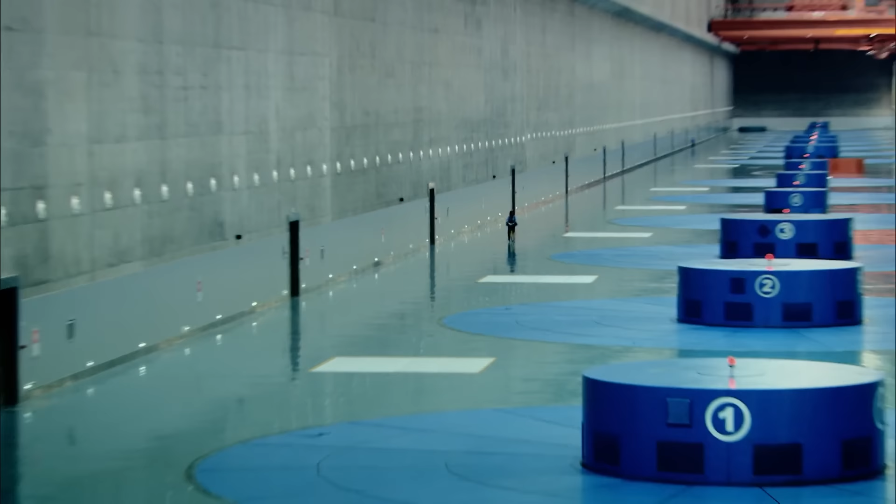In this episode, an engineering project of epic proportions. It's the weirdest sensation, it's really insane. I think it's the greatest project I've ever seen. Harnessing energy on a record-breaking scale. Just listen to that - that is the sound of huge quantities of water. And the pioneering historic innovations. Wow, it takes your breath away. This is an amazing, but quite terrifying experience. That made the impossible possible.

China, the biggest manufacturer in the world, and soon expected to have the largest economy of any country on the planet.

But all that success brings with it a major challenge. China is a country with an unquenchable thirst for energy.

Something engineer and Shanghai resident Yewande Akinola witnesses firsthand every day. Living in downtown Shanghai, it's so easy to see how much energy is consumed on a daily basis. In this city alone, population has grown to 24 million people. That is why this country needs more energy.

China's traditional power stations burn as much coal as the rest of the world combined. But with fossil fuels a finite resource, China's engineers face a seemingly impossible problem: how to keep the lights on and China's dreams alive.

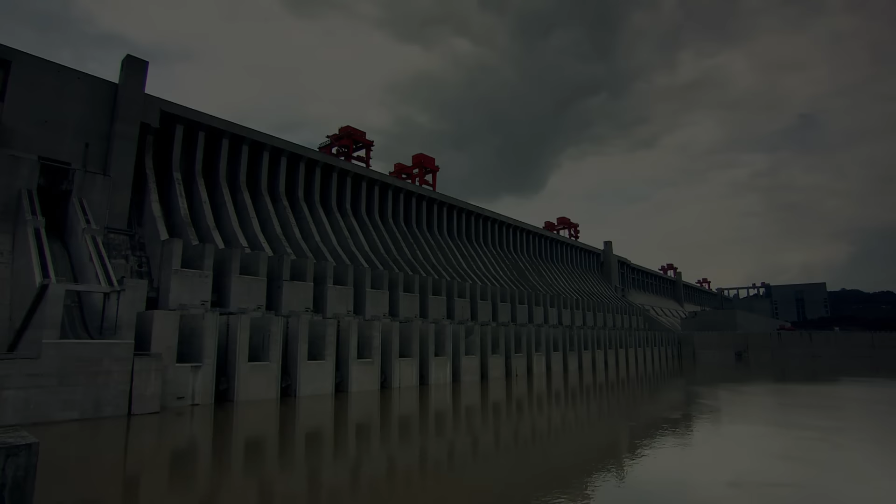The area is prone to catastrophic floods. To lessen the possibility of flood damage and to create a source of clean power, engineers have dreamed of building a dam like this for the last 100 years.

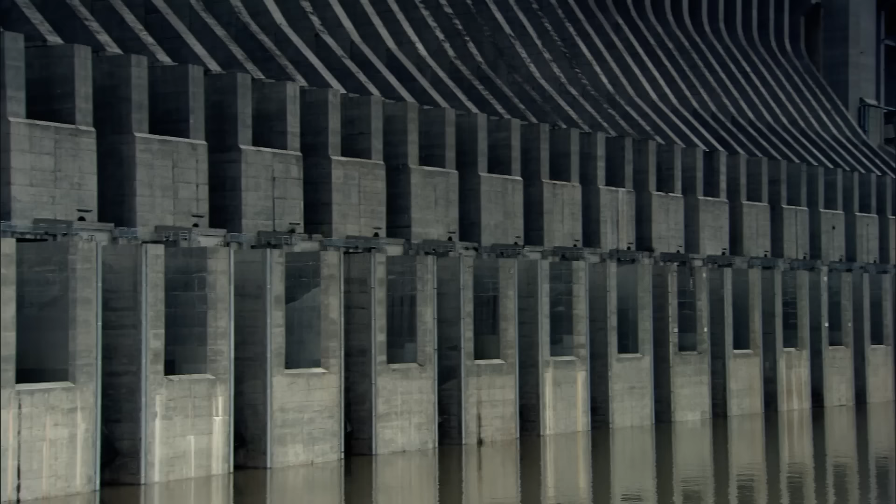Construction is now entering its final phase. For Deputy Director of Construction Technology, Mr. Qihua Ding, it's the challenge of a lifetime. I've been working here for more than 30 years. I think it's the greatest project I've ever seen.

In order to create such a seemingly impossible structure and harness the power of one of the world's largest rivers, engineers need to draw upon centuries of innovation.

Humans and the odd animal have been building small dams since the dawn of history. In the ancient Middle East, they realized that dams could protect from floods in wet weather and store water in dry seasons.

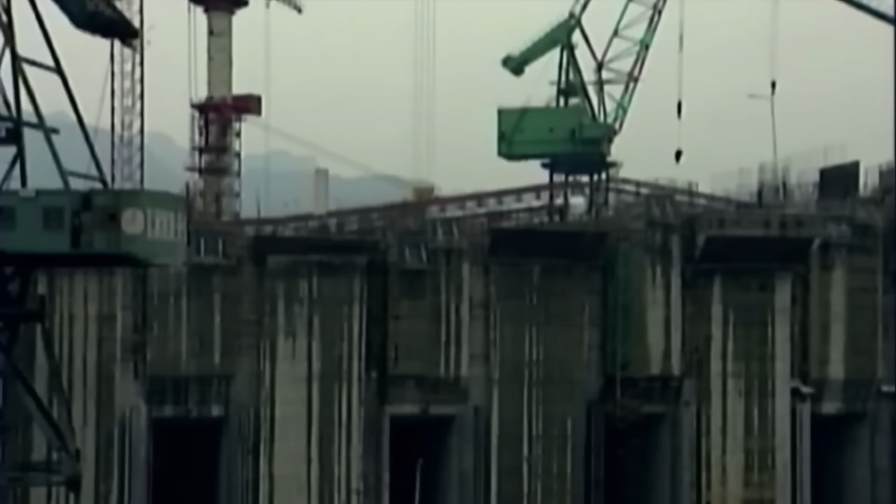But China's Three Gorges Dam will eclipse anything ever built before. The Three Gorges Dam is the biggest dam in the world. It has a quantity of more than 28 million cubic meters of concrete.

With tens of millions of people living further along the Yangtze, getting the build right is literally a matter of life and death.

With millions of tons of water pushing against the wall, the residents downstream are really depending on this wall to stay up. Any imperfections and the consequences could be catastrophic.

Such a feat of concrete construction would be impossible without one of history's great innovators.

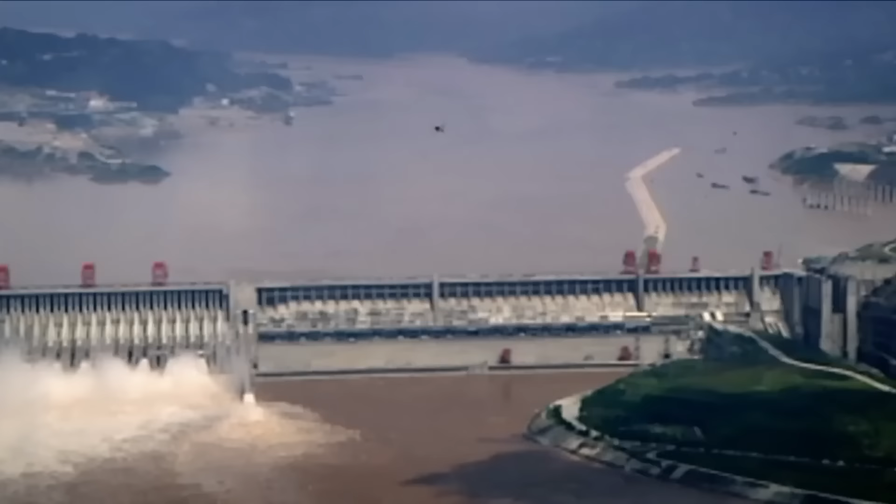In the early 20th century, the parched American Southwest was becoming desperate for both water and power. It was a problem that would require an epic engineering solution. And Professor of Civil Engineering Andrew Smith is heading for a bird's eye view of it.

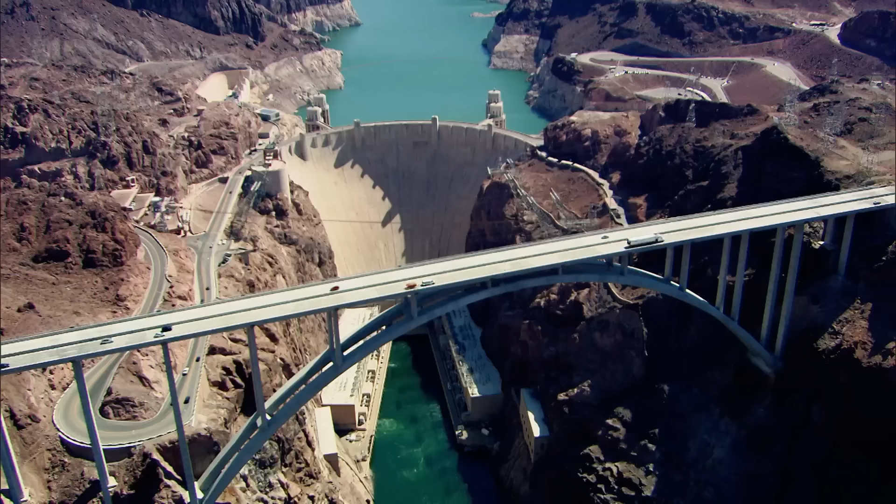Wow. This is the Hoover Dam. At the time of its construction, this was the world's largest concrete structure that had ever been built.

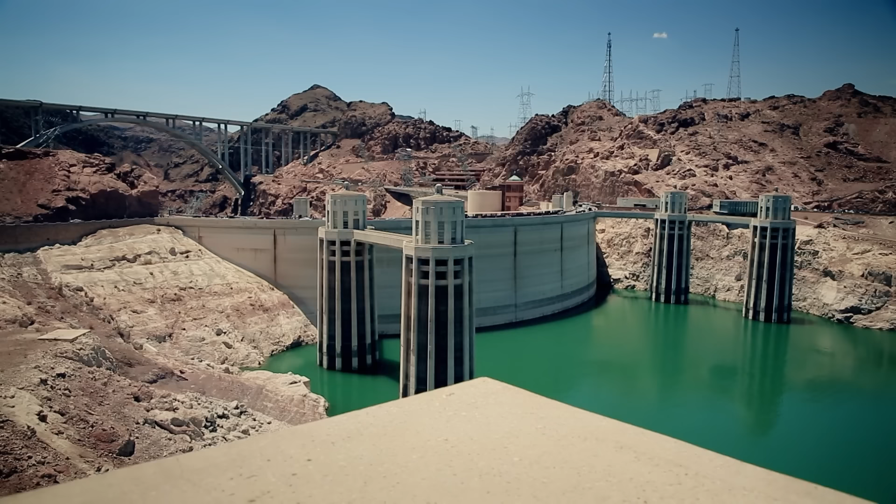Even today, roughly 80 years later, it takes your breath away. The Hoover Dam was like nothing that had been built before. Weighing in at 6.6 million tons of concrete, this was an unparalleled engineering marvel.

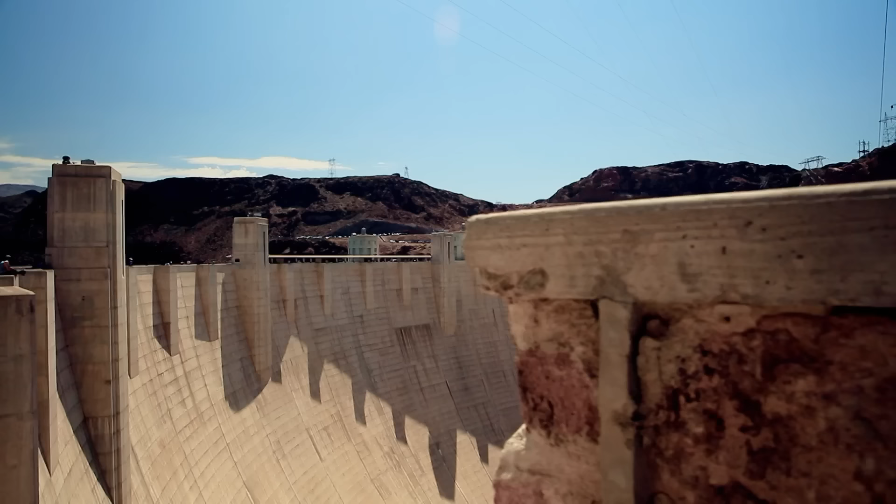By attempting to tame the mighty Colorado River and harness the power locked within it, its engineers were setting themselves a seemingly impossible challenge. The dam stands 700 feet tall and has a base thickness of 660 feet. The biggest problem and the biggest challenge was one of sheer scale.

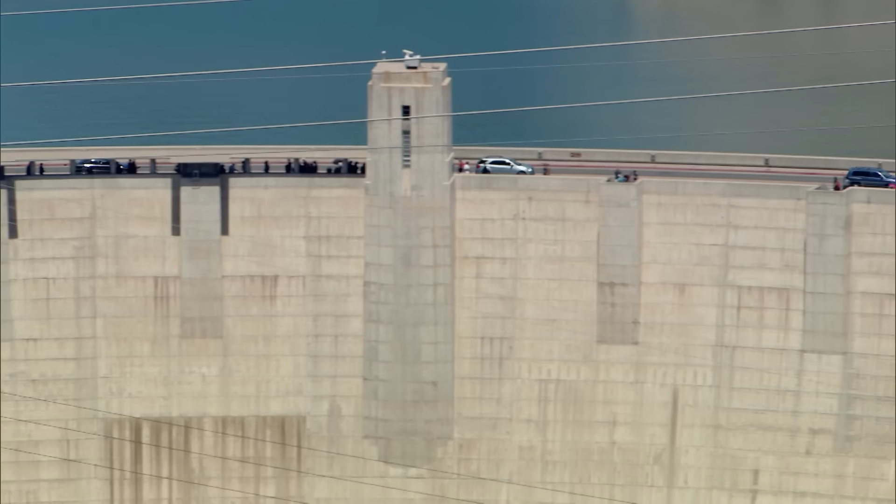The problem lies in the way that the chemical components of concrete react. So what I have here is cement as well as water, and these are really the two main active ingredients in the curing process. Now, before it really starts to cure, let's quickly check the temperature.

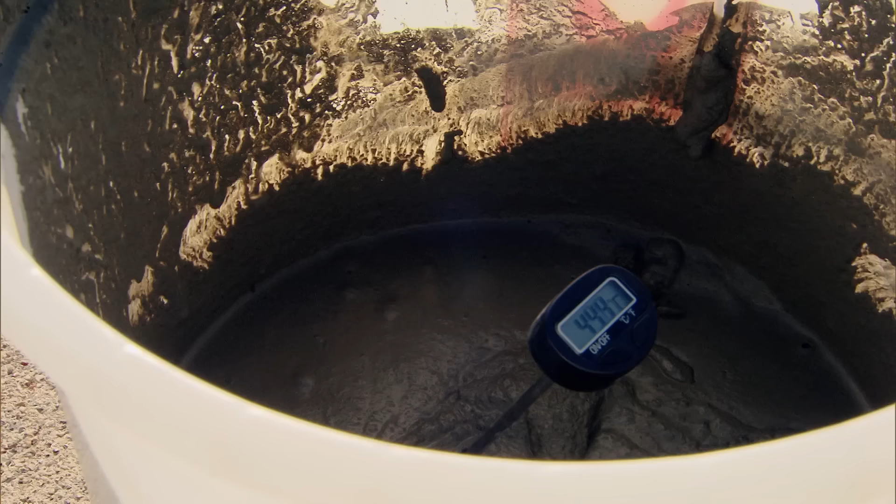Before I dipped it into the concrete, the thermometer was already reading 44 degrees Celsius. Gives you an idea of how hot it is here. It takes just half an hour for the temperature of the mix to reach its peak at 68 degrees Celsius. That's an increase from our original temperature of 24 degrees Celsius. And you could really, really feel the heat.

Engineers estimated that if they poured all the concrete in one go, it would take 125 years to cure and cool, meaning uneven setting and potentially catastrophic cracking.

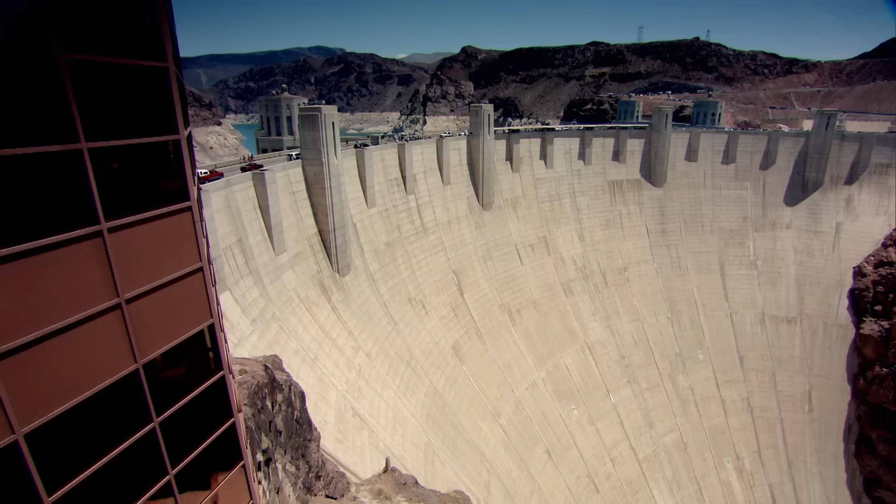It was down to the project's general superintendent, Frank Crowe, to solve the conundrum. And what he came up with is still visible today in the old engineers' inspection tunnels, running deep within the dam.

Frank Crowe, nicknamed here on the site Hurry Up Crowe, came up with an ingenious method for cooling the concrete to help it cure faster. The solution was to pass extremely cold water through 1-inch pipes. And the amazing thing is we can actually still see evidence of those pipes here.

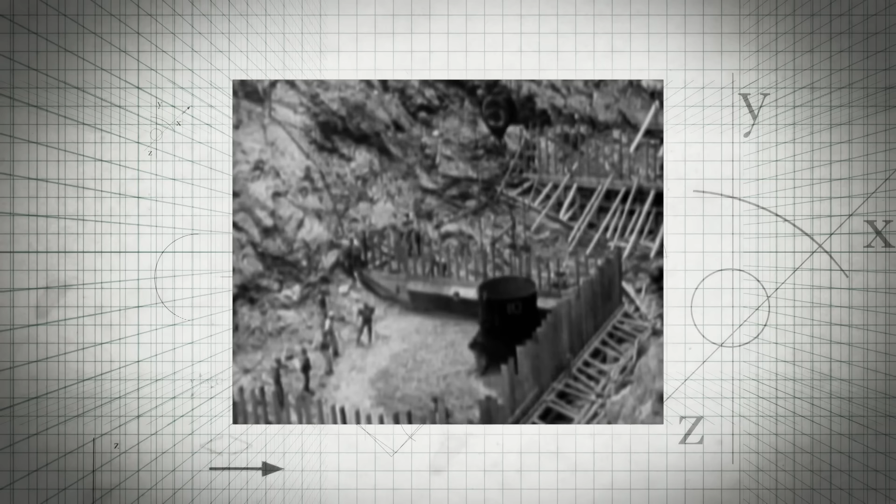In 1931, thousands of workers began constructing the dam out of a series of gigantic blocks, all the time cooling the concrete with ice-cold water, produced by a specially built refrigeration plant. And it worked perfectly. The whole job was completed in 1935, 2 years ahead of schedule.

And the record-breaking dam even created a record-breaking body of water behind it. This is Lake Mead. When the dam was erected, it became the world's largest man-made lake. At full capacity, they say, the volume of water could cover the state of Connecticut with 10 feet of water.

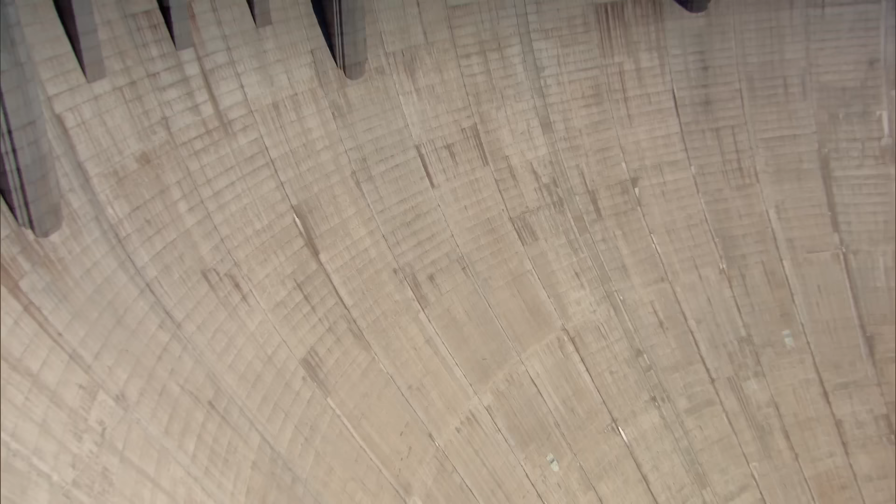As an engineer, this is an incredible sight to see. Harnessing the power of the Colorado and the giant Lake Mead meant even now, over 80 years later, the Hoover Dam provides electricity to 3 states and brings light to some of the world's great metropolises.

Impressive as the Hoover Dam is, the Three Gorges Dam is an incredible 5 times the size. The height of the dam is 181 meters, and the total length of the dam is 2,309 meters. The design requires almost 28 million cubic meters of concrete.

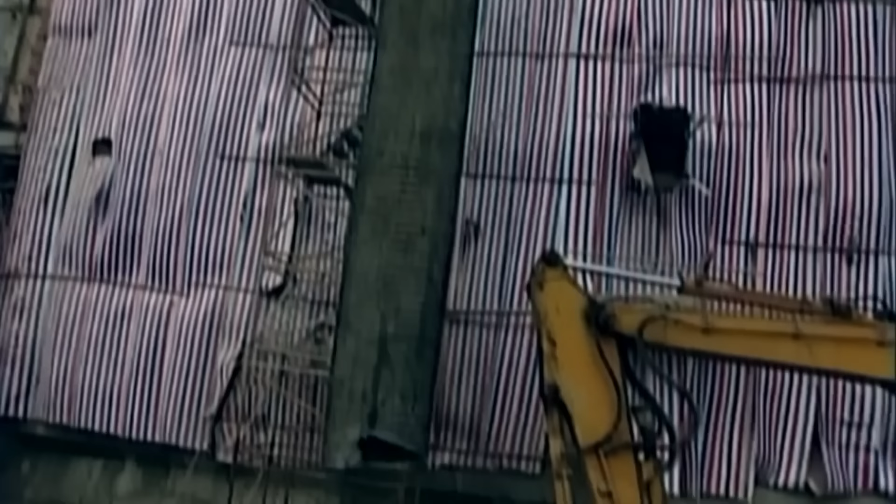In 1998, pouring begins. To accelerate the setting process and reduce risk of cracking, engineers take the techniques pioneered at the Hoover Dam to a whole new level. The ingredients are air-cooled even before they're mixed.

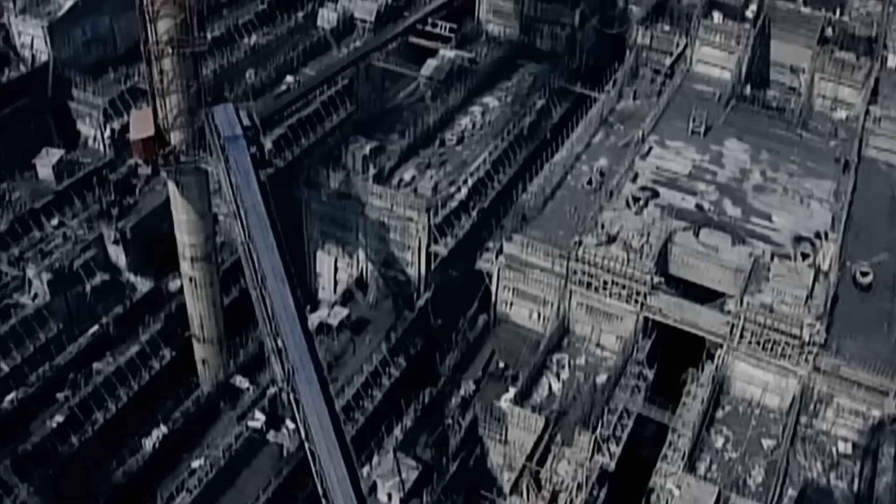High-speed conveyors take the concrete from mixing zone to site in just 15 minutes, and vast amounts of workers are used to pour an average of 20,000 cubic meters every single day. In the peak period, more than 30,000 people took part in the construction.

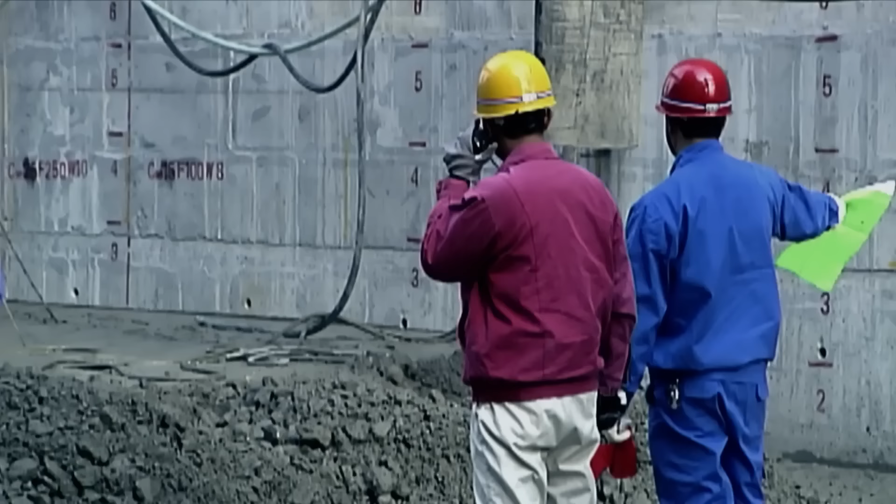Water cooling is supplemented with a mist sprayed over the working area to reduce the effects of the hot summer weather. The enormous concrete pour takes a total of 8 years.

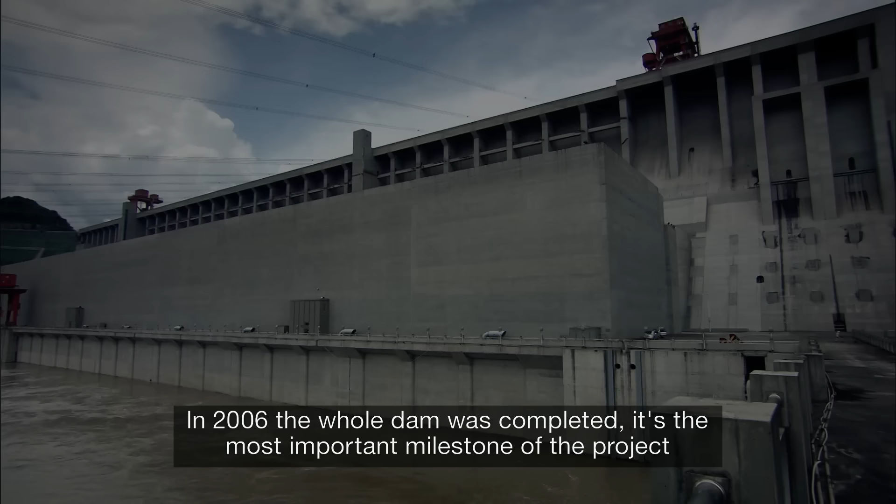In 2006, the whole dam was completed. It's the most important milestone of the project. Of course, I was very excited at that time.

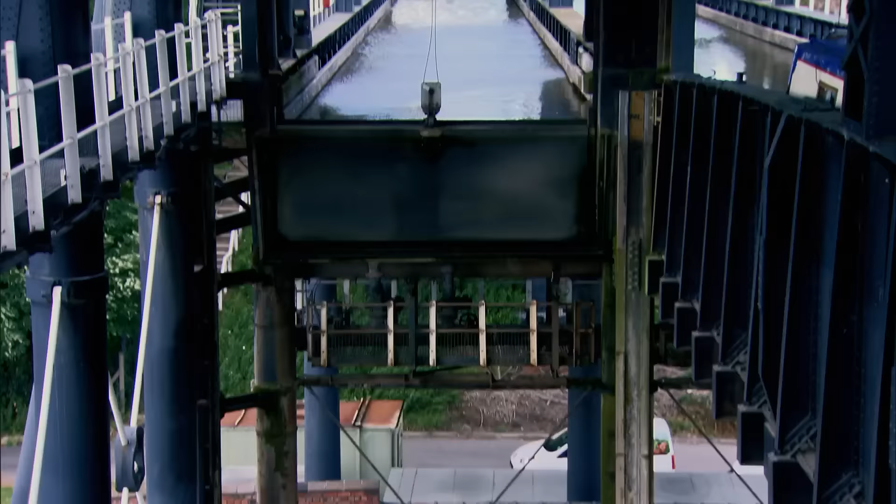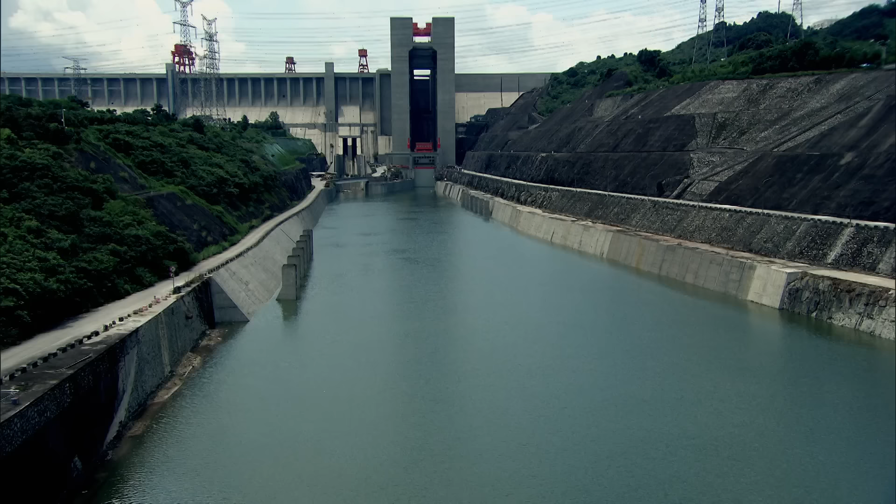At over 2 kilometers long, the Three Gorges Dam in China is one of the most ambitious engineering projects ever attempted. Built to tame the regular floods that hit the Yangtze River and harness the clean hydroelectricity potential of China's largest waterway.

Engineer and Shanghai resident Yewande Akinola has travelled to see firsthand how its creators are taking on this seemingly impossible challenge. The Yangtze River is the 3rd largest and longest in the world, running at 6,400 kilometers.

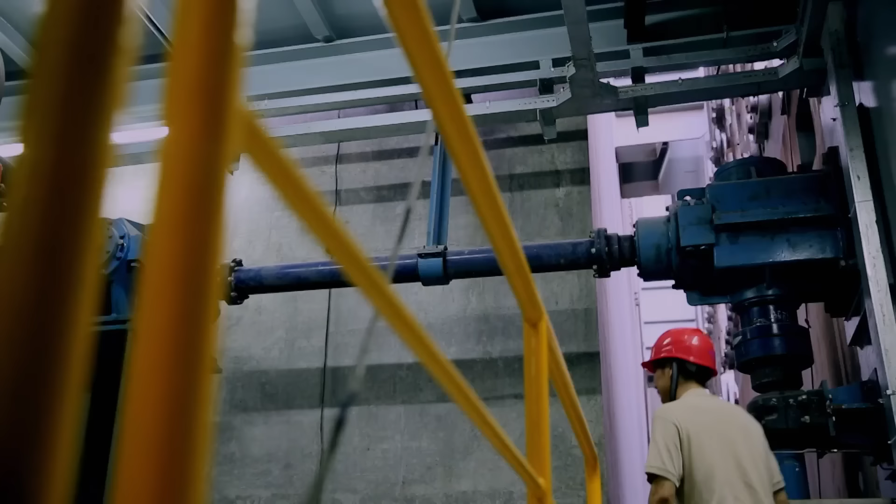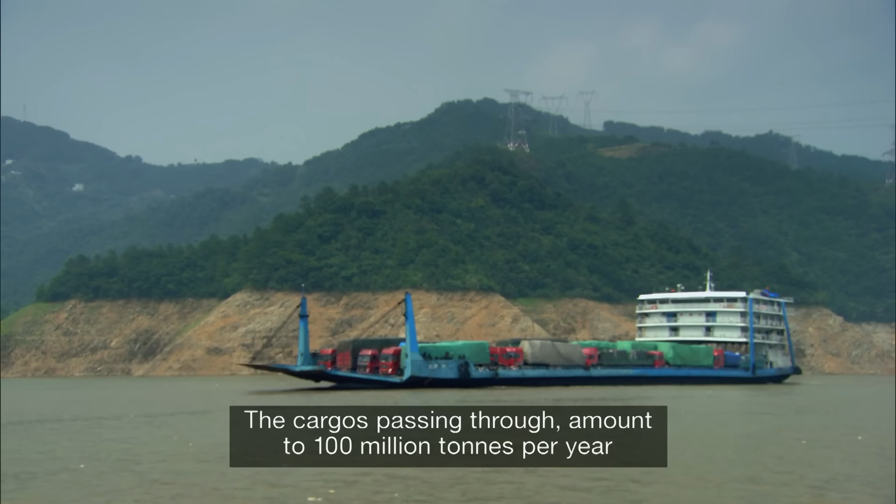And the river is now the lifeblood for the thousands of people who live along it. For Three Gorges engineer Qi Huading and his colleagues, completely blocking this busy and vital waterway is simply not an option. The Yangtze River is the mother river of the Chinese people. It's the lifeblood of the people along this river. The cargoes passing through amounts 100 million tons per year.

To deal with the cargo ships, the Three Gorges team have employed a technique dating back to medieval times. Here is the Three Gorges ship lock. It's the largest ship lock of this kind in the world. The lock is more than 1.5 kilometers long and raises and lowers the river traffic 113 meters through 5 giant steps.

The ship lock is very busy. It works nearly 24 hours a day. And we take a very small time to maintenance.

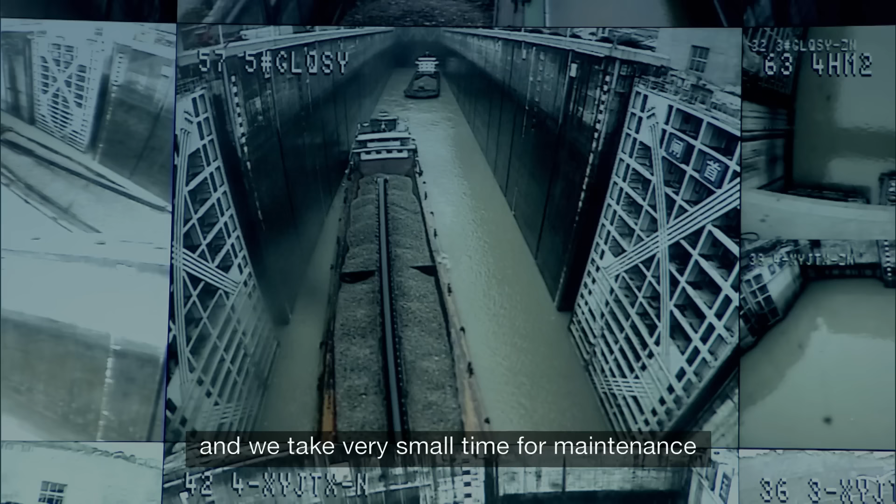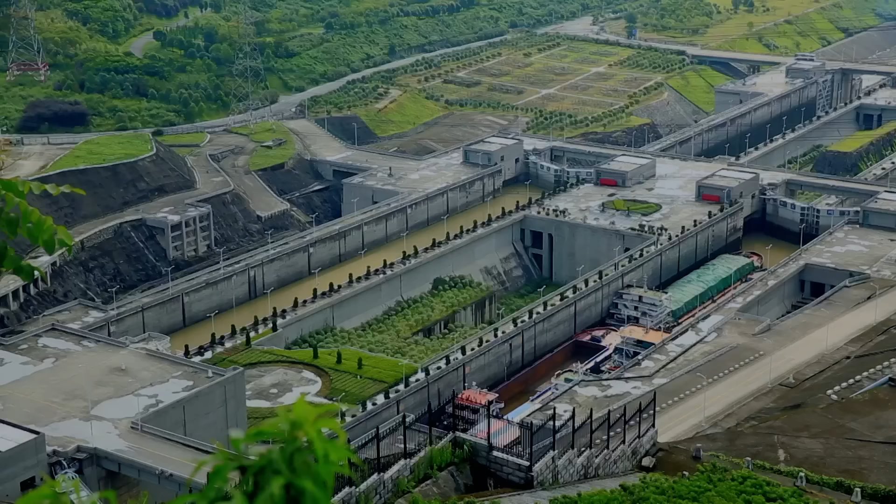But there's one element of this incredible engineering feat that doesn't suit all the vessels on the Yangtze. It takes about 3 hours and 40 minutes or even 4 hours to pass through the ship lock. Taking up to 4 hours to pass through the locks is simply too slow for the river's many passenger ships.

So Mr. Ding and his fellow engineers face another gigantic conundrum. How can they get ships up and over the dam 8 times more quickly?

Anderton, in the north of England. In 1870, designer Edwin Clark was employed to solve a particularly tricky problem, one that would be familiar to the engineers of the Three Gorges. He was asked to find a way to link the busy Trent and Mersey Canal with the adjacent River Weaver.

This was a pretty stiff challenge for Clark in the late 1800s because the height between the canal and the river was about 50 feet. Transferring the salt from the canal to the river was time-consuming, laborious, and really slow. So Clark had to come up with an ingenious solution.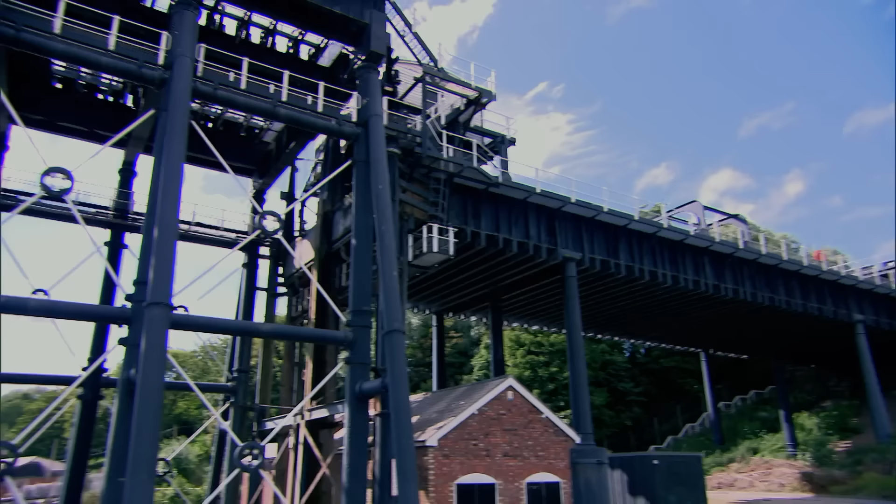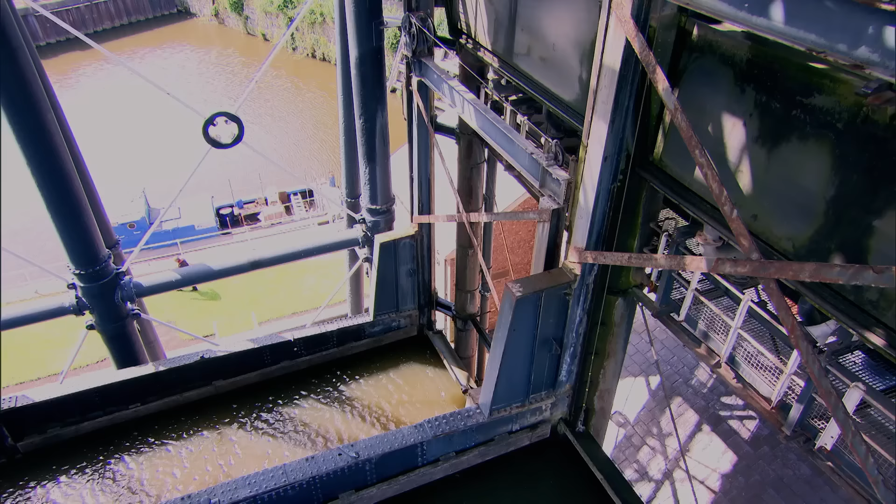Almost a century and a half later, Dr. Rhys Morgan is still able to experience that solution himself. Known as the Iron Spider, the Anderton is the oldest operating boat lift in the world. It's extraordinary. It's a 3-story high marvel of Victorian engineering. It's just fabulous.

Clark's mighty construction scooped up the barges and the water they were floating in and transferred them in one smooth action, 15 meters between the two levels. To do it, he used what was at the time a cutting-edge technology: hydraulics.

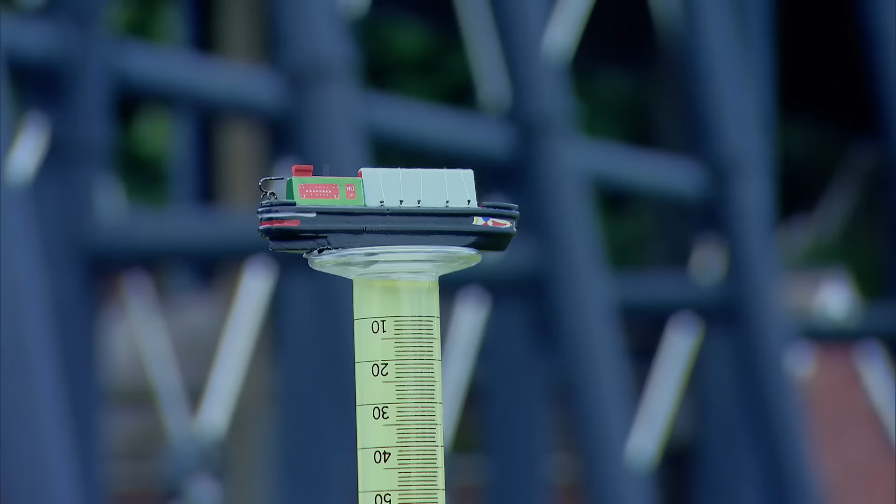The basic principles of all hydraulic systems are defined by a law created by a French mathematician called Blaise Pascal. It goes something like this: if you apply a pressure on a liquid in a closed system, then that pressure is distributed throughout the whole liquid in the system. Edwin Clark used this to great effect with his boat lift at Anderton.

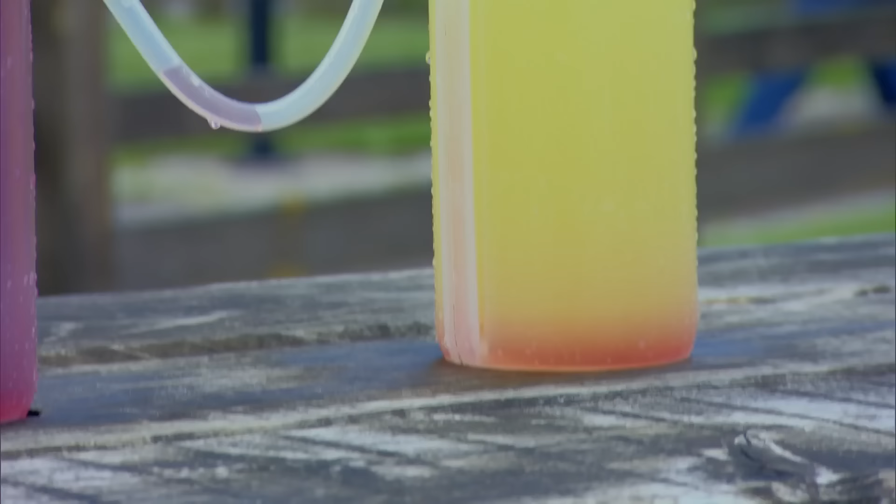He started off by making 2 watertight caissons. These are the tanks which held the boats and the water in which they floated. He supported those caissons on top of 2 hydraulic rams, and there was a liquid in those rams and a pipe joining them both together.

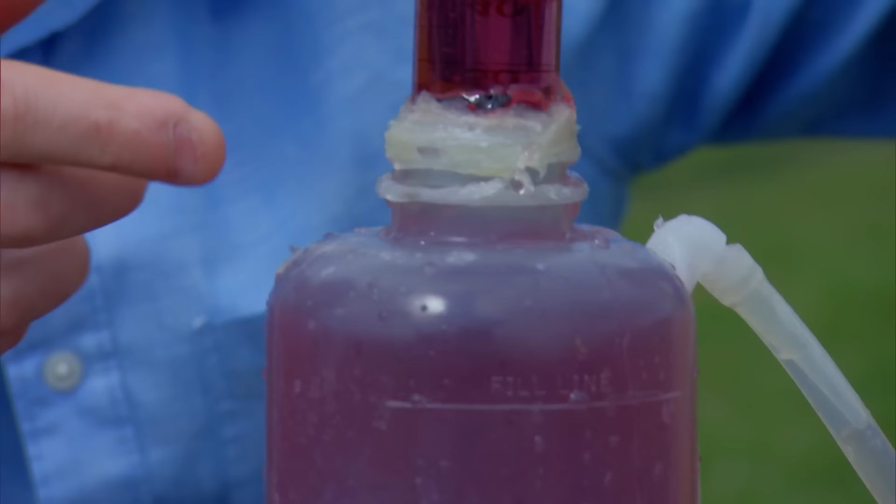So as I exert some additional force to this hydraulic ram, I can start to see that the pressure is being pushed through the adjoining pipe and lifting up my other hydraulic ram. It's brilliant.

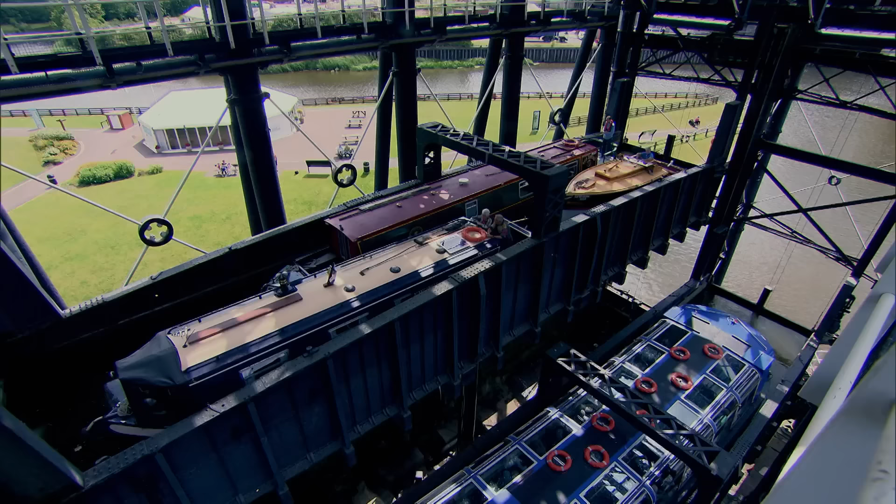The design was genius in its simplicity. The 2 caissons were perfectly balanced, so all that was required to push the upper caisson down and so lift the lower caisson was an extra 15 centimeters of water.

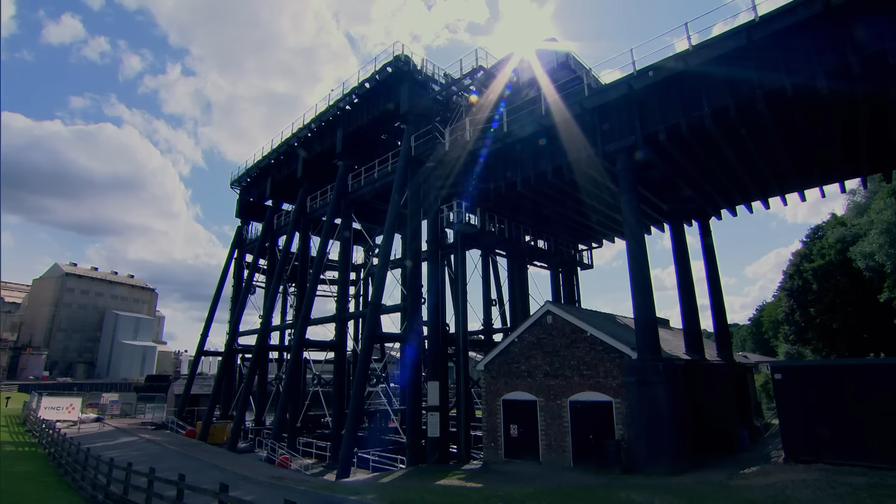The result: an almost effortless rise and drop for up to 4 narrowboats simultaneously. And most importantly, the journey time took less than half an hour, and that saved huge amounts of time and enabled the trade to be much quicker. It's just a fabulous piece of engineering. It's wonderful to be here.

Edwin Clark proved that moving boats between different water levels was no longer impossible, and his ingenuity inspired generations of engineers around the world.

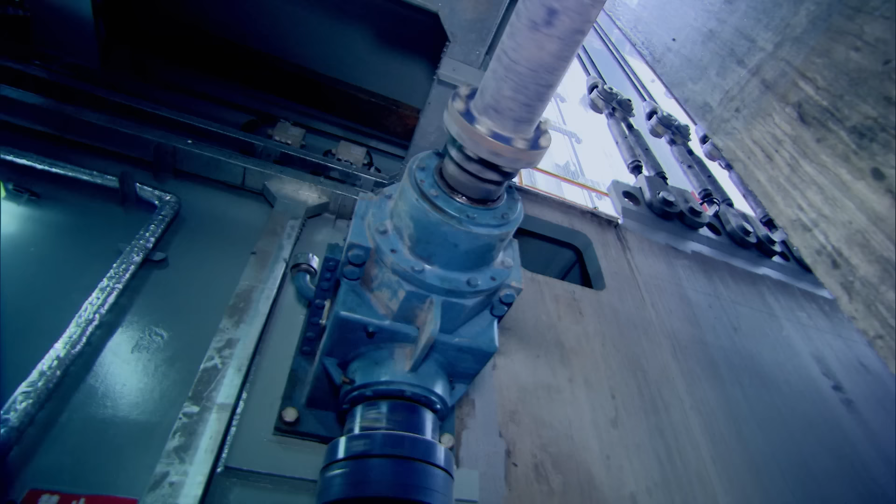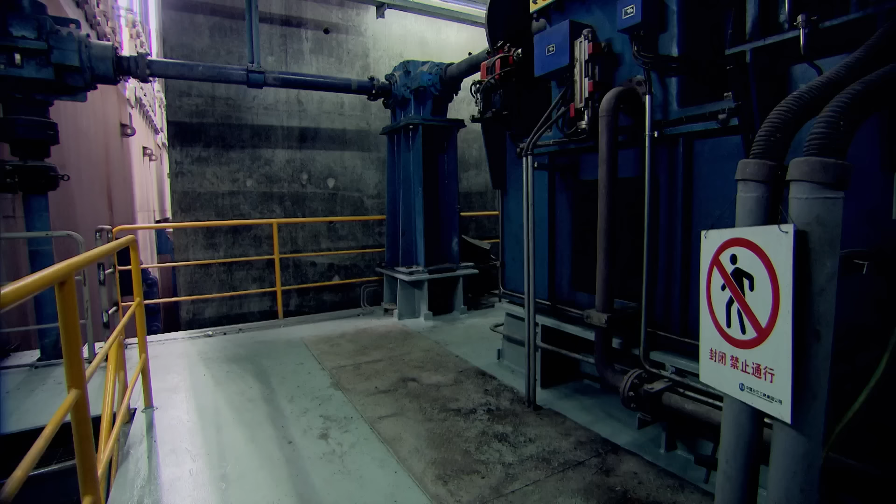It's the weirdest sensation, it's really insane. It feels like I'm in a big, massive swimming pool and being pulled up many, many meters, or in a lift with a massive pool in it, being lifted up. It's an engineering feat, a beauty in so many ways, and super impressive.

Capable of carrying a 3,000-ton passenger liner, this vertical ship lift consists of reinforced concrete towers which support the huge steel pool.

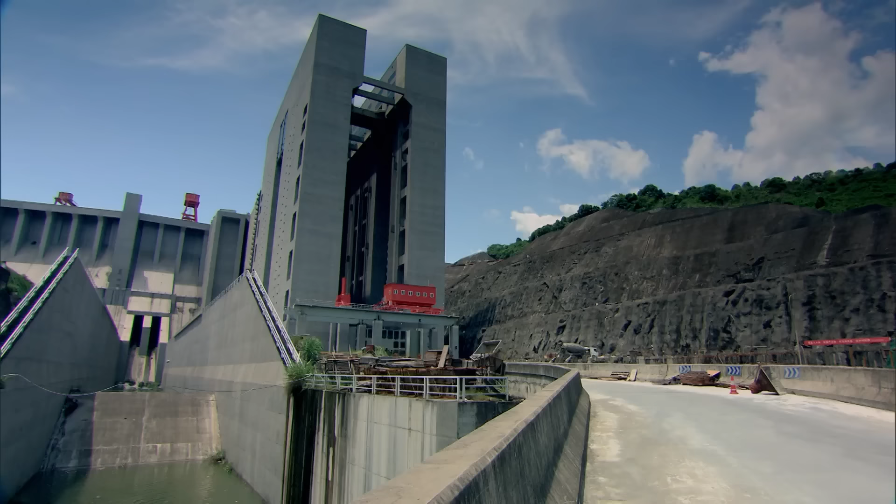Instead of hydraulics, the lift will use massive counterweights and pulleys to lift the 132-metre-long pool and the vessel floating in it a vertical distance of 113 metres. I think it's the best ship lift in the world. The counterweight of the ship lift weighs nearly 16,000 tons.

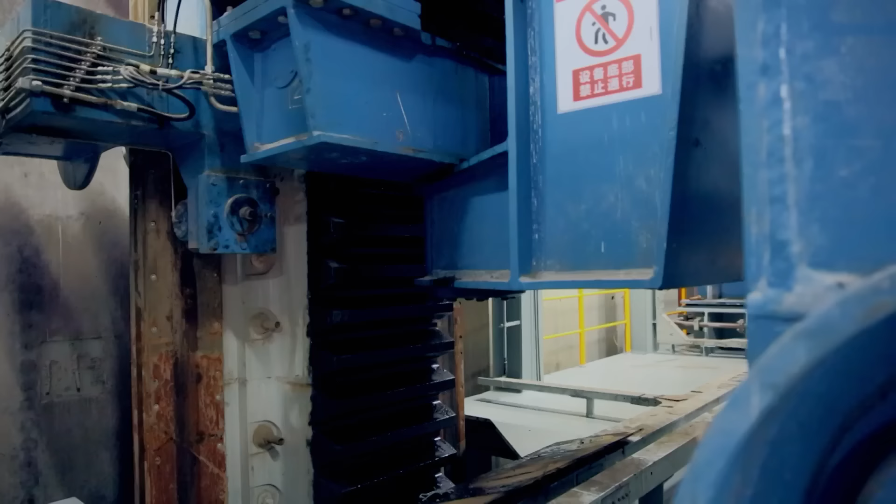I think it's a massive achievement for the Three Gorges Dam. This world record-breaking lift will solve the seemingly impossible challenge of transporting passenger ships across the dam without frustrating delays.

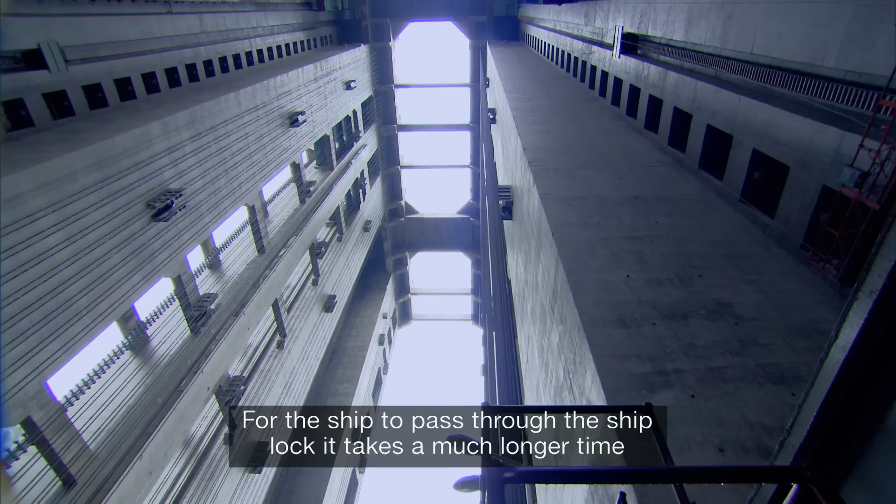For the ship to pass through the ship lock may take much more long time, so the ship lift is the fastest way for the boat to pass through the dam. The Three Gorges ship lift is the biggest in the world right now. To keep passengers happy, when this is complete, it would take only 30 to 40 minutes of travel time from top to bottom. Now, this is a brilliant solution.

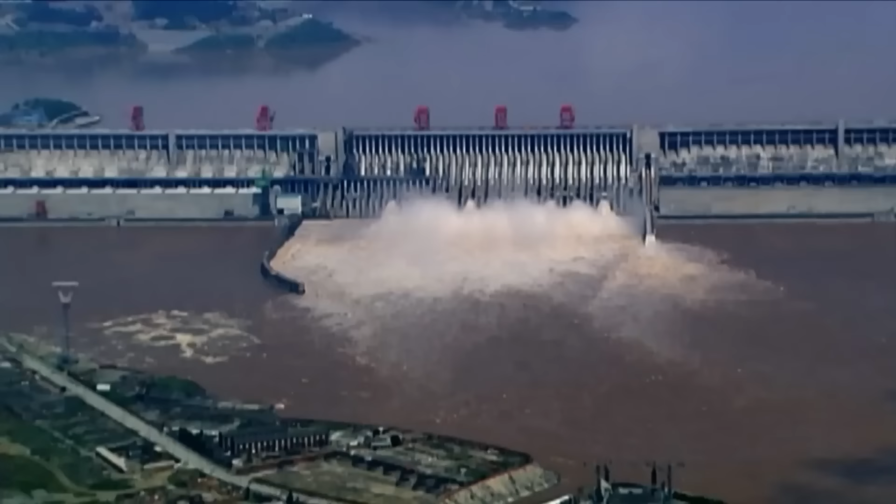Stretching more than 2 kilometers across the Yangtze, it holds back a reservoir of over 1,000 square kilometers. One of its key functions is to reduce the risk of flooding in the region.

Shanghai-based engineer Yewande Akinola has traveled to Hubei province to see how the dam's team are taking on this seemingly impossible engineering challenge.

Every 10 years or so, the Yangtze River floods quite seriously. In fact, over the last 2,000 years, there have been over 200 catastrophic floods, which unfortunately have cost over 300,000 people their lives.

Dams can help control the effects of excessive rainfall, but extreme floodwaters can also cause dams to collapse, with catastrophic consequences.

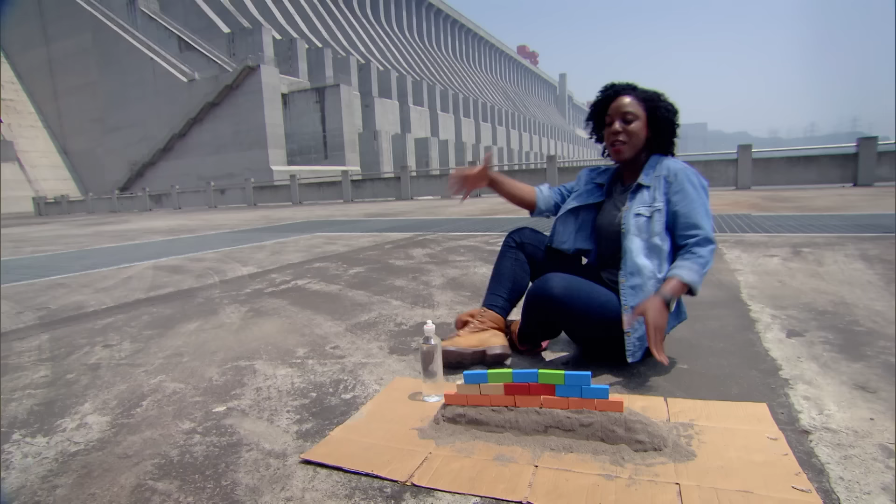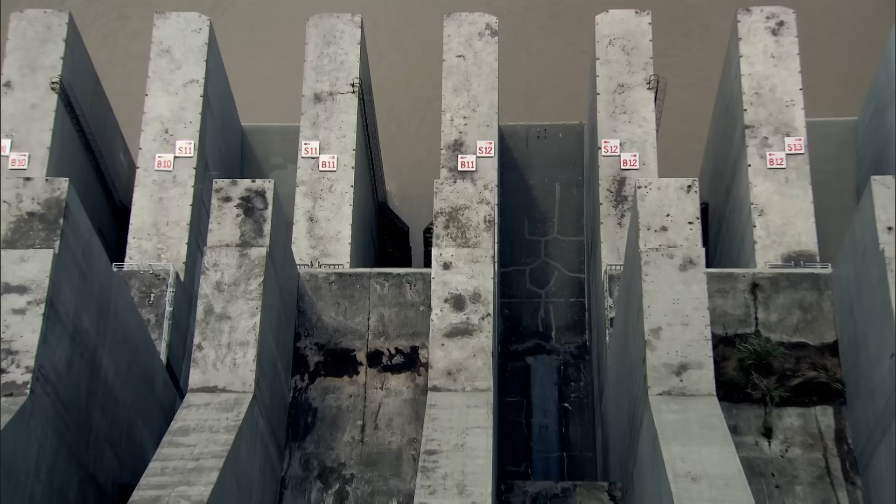One problem is called toe scour, when water spills over the top of the dam and wears the foundations away. Now, if we imagine a flood situation where we have lots and lots of water flowing over this dam, we've got all that water hitting the bottom of the dam. As we can see here, the integrity of the dam becomes very questionable and it starts to collapse. So there it goes. The consequences of the giant Three Gorges Dam failing are almost unimaginable.

So, to reduce this deadly risk, its designers need to look to one of history's great innovations. In the 1930s, construction began on the first large-scale dam on the French River Dordogne. Engineer André Coyne was given the job.

This is an amazing but quite terrifying experience. Dr. Rhys Morgan is getting up close and personal with the mighty dam.

I'm here with this huge dam behind me, and I'm stood next to this overflow channel, and luckily for me today, the gates aren't open, because if the reservoir was too high and the water was overflowing, the gates would be opened and some 700 cubic meters per second of water would be gushing out, flowing down this spillway, and I'd probably be blown away just by standing here.

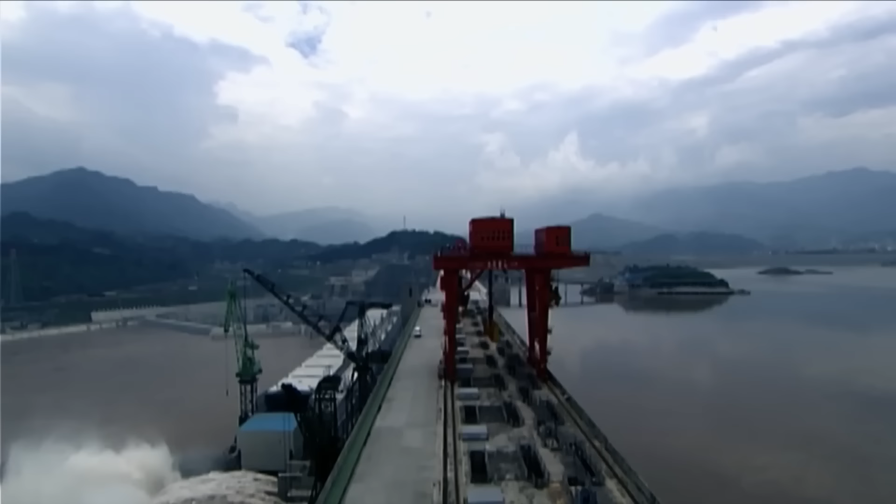So how can engineers make the Three Gorges project the most productive hydroelectric power station on Earth?

Man has always recognized the potential power of water for industry. Ancient miners built dams in order to collect water and then release a wave to scour the land.

In the Middle Ages, Islamic engineer Al-Jazari designed dozens of ingenious water-powered devices, from irrigation systems to extraordinary clocks. Have you got the time?

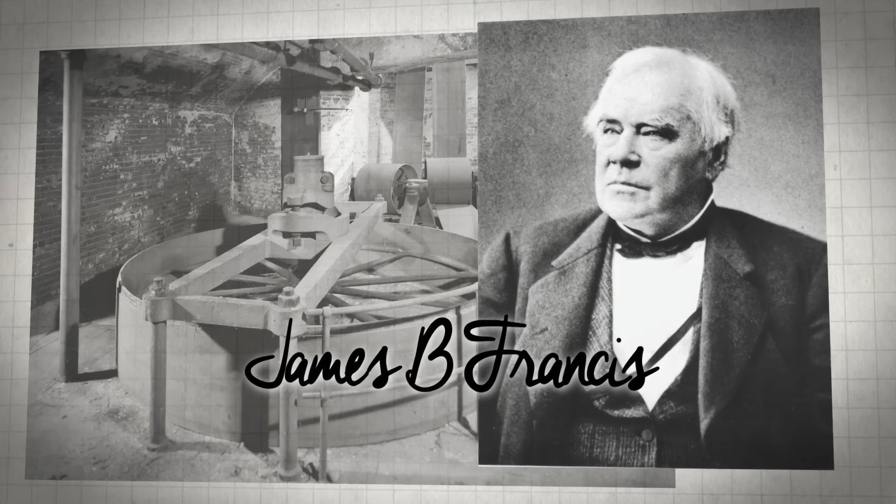But it would be the Industrial Revolution that would take hydropower to another level. In 1834, British-born engineer James B. Francis arrived in the busy textile town of Lowell, Massachusetts.

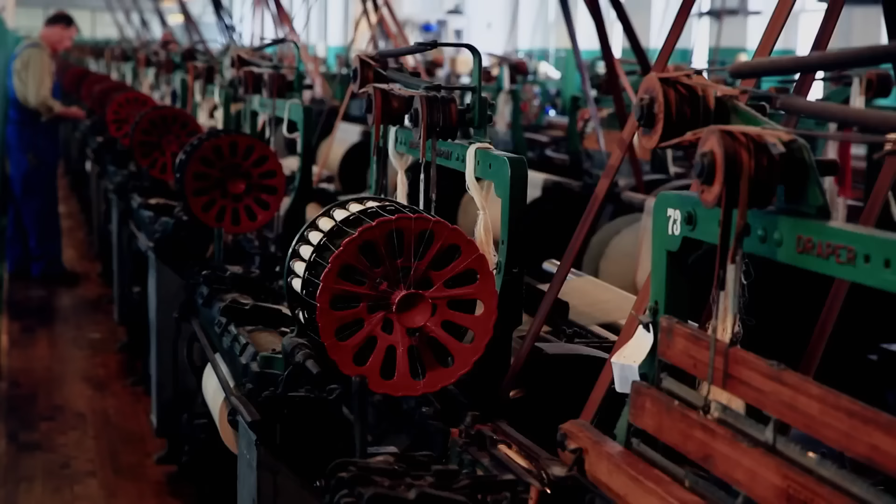At the time James Francis arrived here in Lowell, massive mills like this one were sprouting up all along the vast canal system. The mill complex ultimately would produce up to 160 miles of cloth every day.

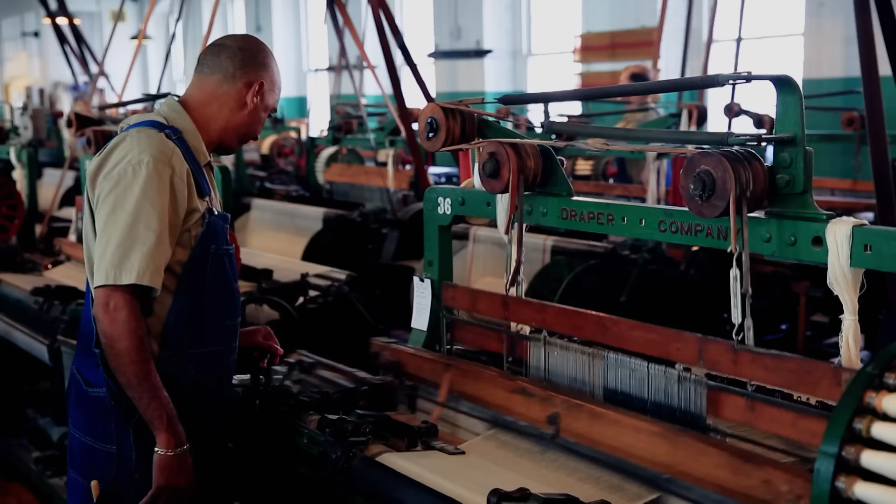But the power began to run out. With the industry's thirst for energy, the water in the canals became increasingly precious. It fell to James Francis to find a way to squeeze as much power as possible out of each and every drop. The problem was that the mills here in Lowell were being driven by simple water wheel systems. These are relatively inefficient. They're driven by water falling into the buckets to make them turn, only using a portion of the energy available here in the canal system.

What Francis went on to design would change the world forever. And his original invention can still be found deep within the canal complex.

Wow, so this is it. This is the site of the very first James Francis turbine. The turbine is actually 5 meters below us. It's amazing to think that this turbine right here started the hydropower revolution.

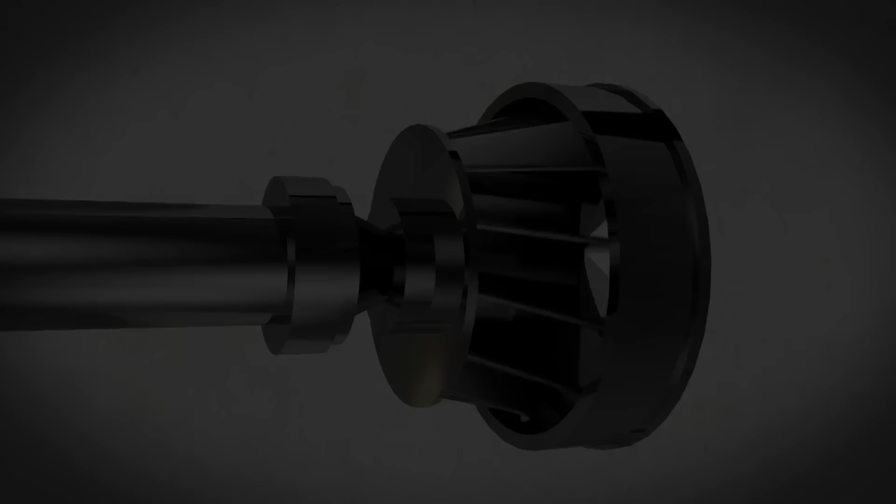James Francis took the idea of a water wheel and turned it on its side. He enclosed his turbine so water was in contact with the whole wheel constantly. And he added a series of vanes to direct the water at the optimum angle.

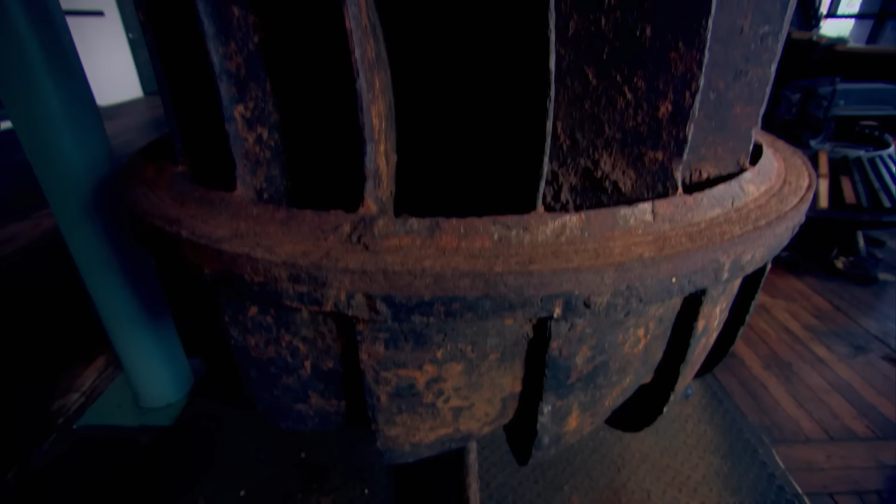So here we have a deconstructed Francis turbine. This was actually one of the last turbines installed here at Lowell, and we can see how it works. The water would be guided in with directed vanes, then would hit these runner blades, and as the water strikes the runner blades, it drops down and comes all the way out down below here.

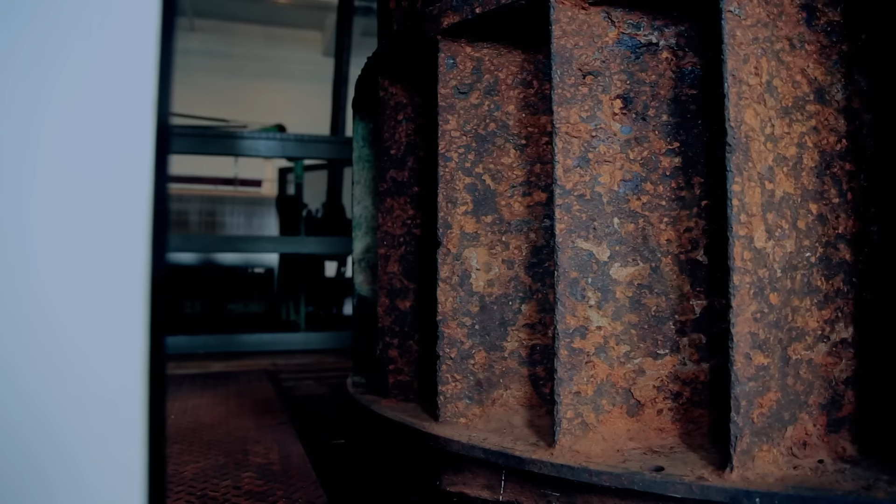The sum total of all those enhancements led to nearly 90% efficiency of the turbine. It was so successful that even today, the Francis turbine is still the world's most used design. Francis was a brilliant engineer who made a massive contribution to the Industrial Revolution.

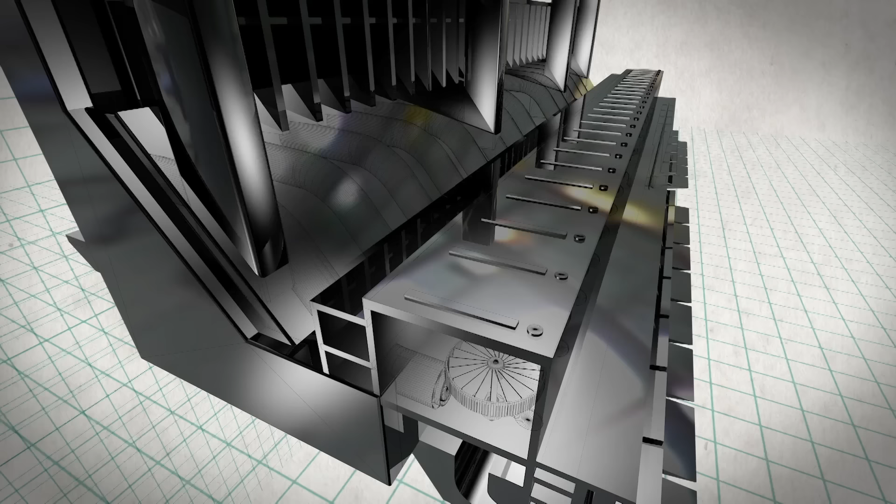The Three Gorges Dam is the biggest hydroelectric project of all time. So it's fitting that it should use the world's largest Francis turbines. This is one of the 2 turbine buildings, and just listen to that. That is the sound of huge quantities of water traveling at up to 80 miles per hour, turning the 32 largest ever Francis turbines built.

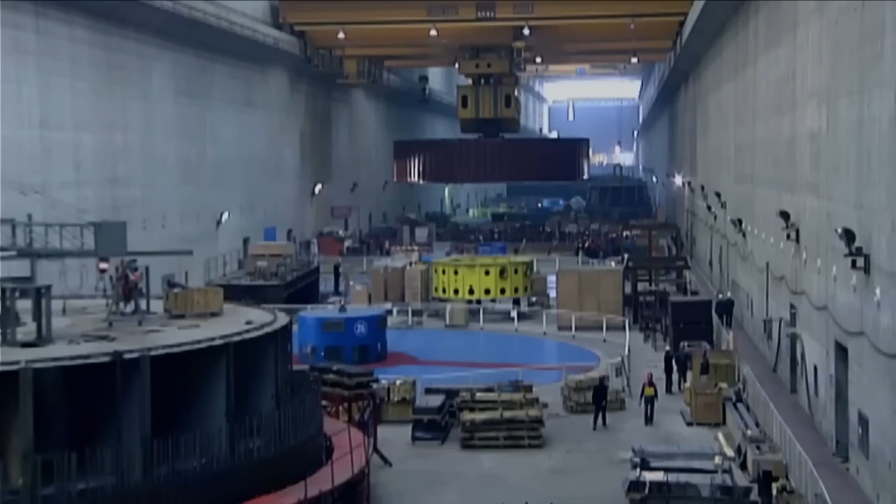Installing the giant turbines was an engineering feat in its own right. Each turbine weighs 450 tons, and the crane required to install them had to be factored into the design of the hall from the outset. And the UFO-like generators that convert the momentum of the turbines into electricity are some of the biggest of their kind.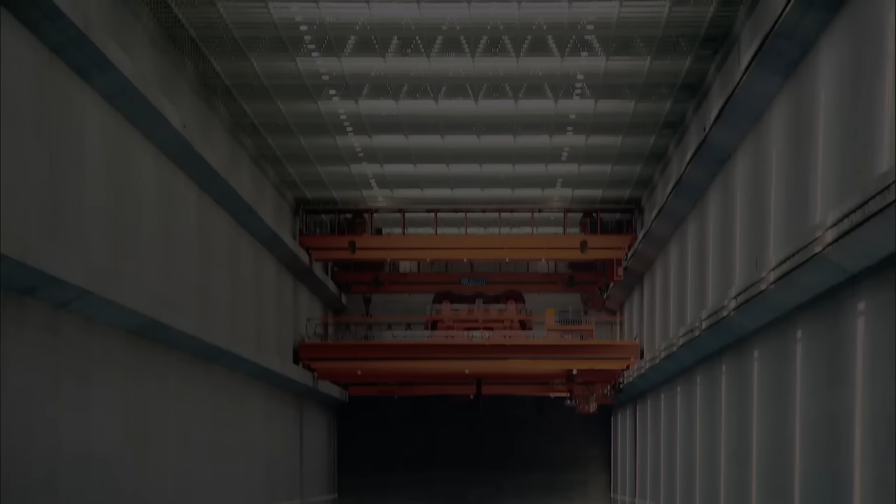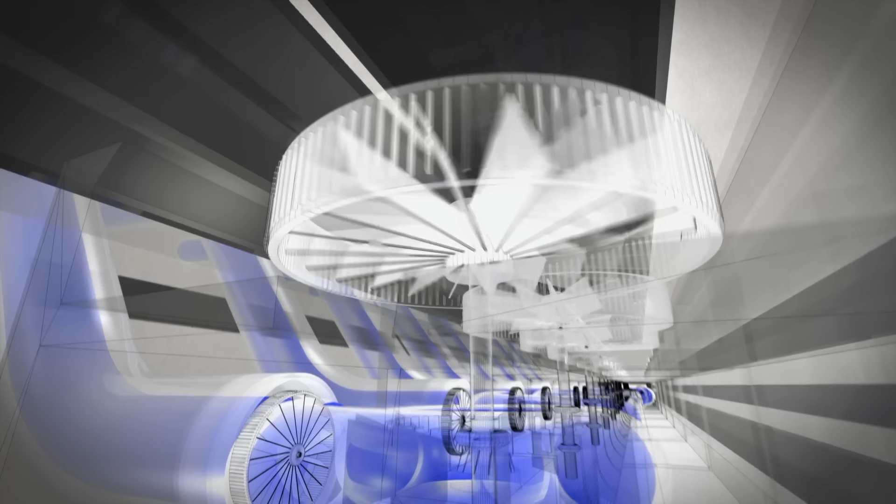These 450-ton turbines can generate the equivalent electricity of 25 million tons of crude oil, and wait for it, 50 million tons of coal. The water enters through a series of huge inlets and falls 80 meters towards the Francis turbines, with a flow rate of up to 950 cubic meters per second. This torrent then rotates each turbine at 75 revolutions per minute, which in turn drives the generator above.

And each one of these turbines can, in a day, produce enough power to power over 16,000 TV sets. I think that is just amazing, really cool.

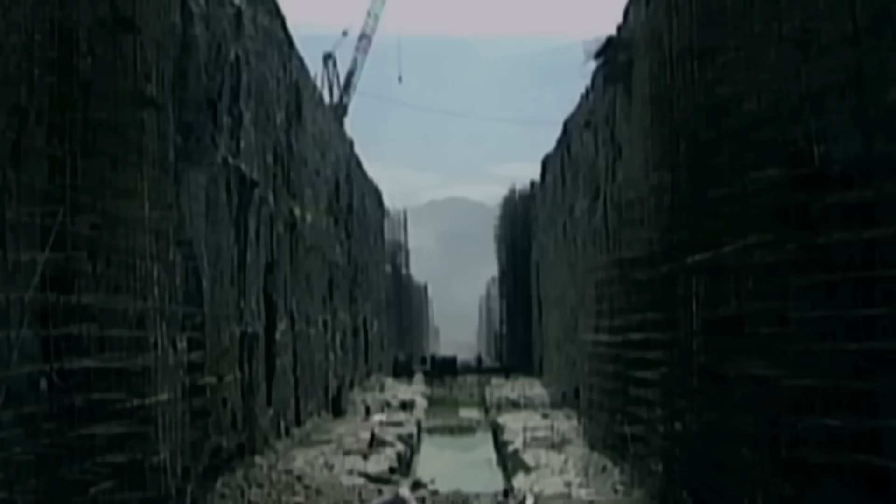In 1994, work began on one of the most ambitious engineering projects of all time. China's colossal Three Gorges Dam is designed to combat catastrophic floods and produce vast amounts of hydroelectricity.

But whilst its potential to produce energy is huge, the dam's location presents another seemingly impossible problem. The dam is 1,000 kilometers away from Shanghai and other key industries lying in the east. Engineers needed a system that would deliver that energy huge distances with minimum losses. And they wouldn't be able to do it without one of history's most extraordinary engineering dreamers.

In the 19th century, distributing electricity was a big problem. But that would change when engineers decided to tap into one of the world's most awe-inspiring natural phenomena.

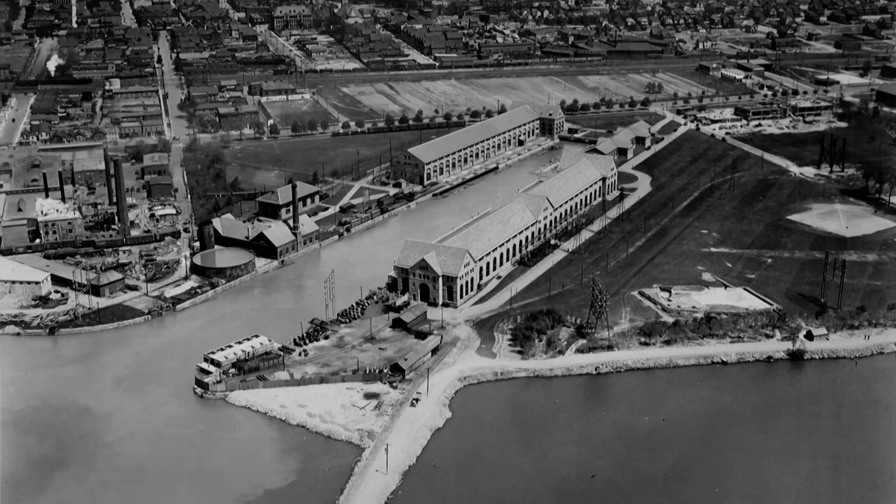In this building, history was made. And the man behind it was engineering genius Nikola Tesla. Once regarded as the archetypal mad scientist, the Austrian-born Tesla was an innovator and inventor who patented literally hundreds of groundbreaking ideas. And here, in 1895, one of his designs would be at the heart of the first large-scale generating plant in the world, a new super-efficient form of transformer.

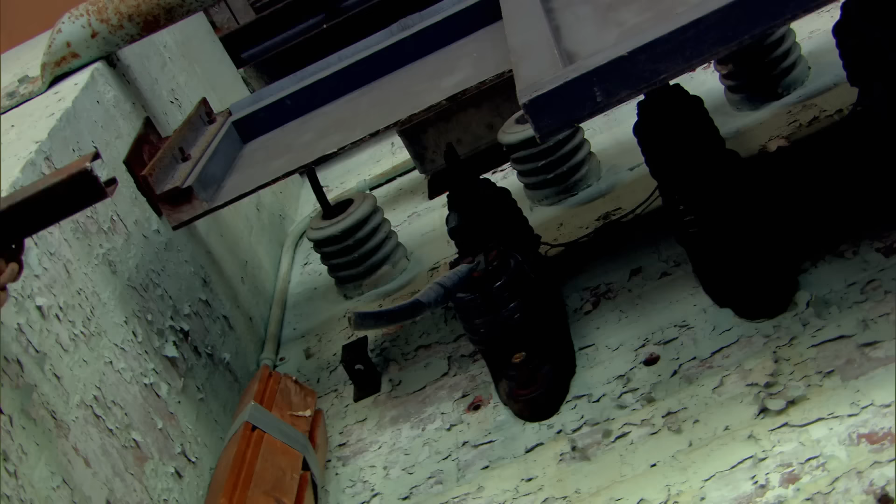Here you would have seen 2 rows of massive AC transformers. These stepped up the voltage from the adjacent power plant and distributed it directly from this building 25 miles down the road to Buffalo. Tesla's transformers were the magic that made this groundbreaking power plant possible.

To demonstrate what a transformer does, we have the simple racetrack setup here. I'm going to start by supplying the same amount of voltage to each track, just over 6.8 volts. Okay, so let's give it a try with both tracks at the same voltage. That's exactly what we expected - the dead heat.

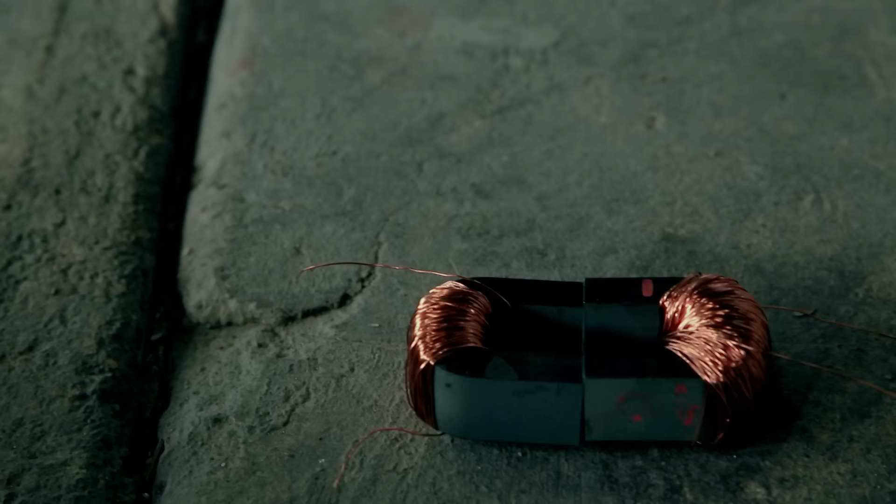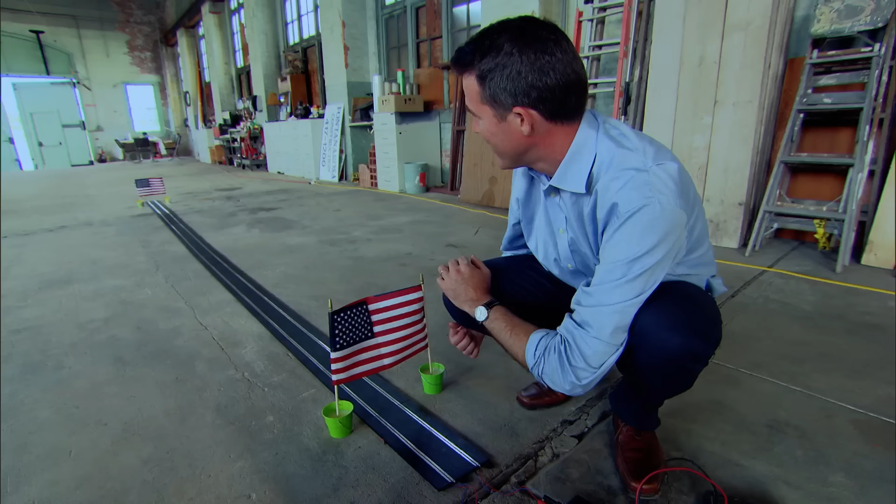Now let's do the same experiment again, but step up 1 track's voltage with a transformer. So now, let's race. Sure enough, the stepped up voltage produced a faster car. A step-up transformer works by sending power into a primary coil, which will create an alternating magnetic field. When a secondary coil that has more windings on it is placed beside it, that alternating field is transferred and, thanks to those extra windings, creates an output with a higher voltage.

And sure enough, that's reading almost 2 times what we had originally. Purple car should win. Perfect.

Instead of shooting cars down a track, Tesla's transformers enabled the power company to shoot electricity great distances across the country. A massive engineering breakthrough pioneered in this historic building, now considered to be the birthplace of the modern hydroelectric power plant.

The Niagara Falls power plant is now one of the world's largest sources of electrical power, providing up to 2.5 million kilowatts of electricity. Thanks to Tesla, the impossible was made possible.

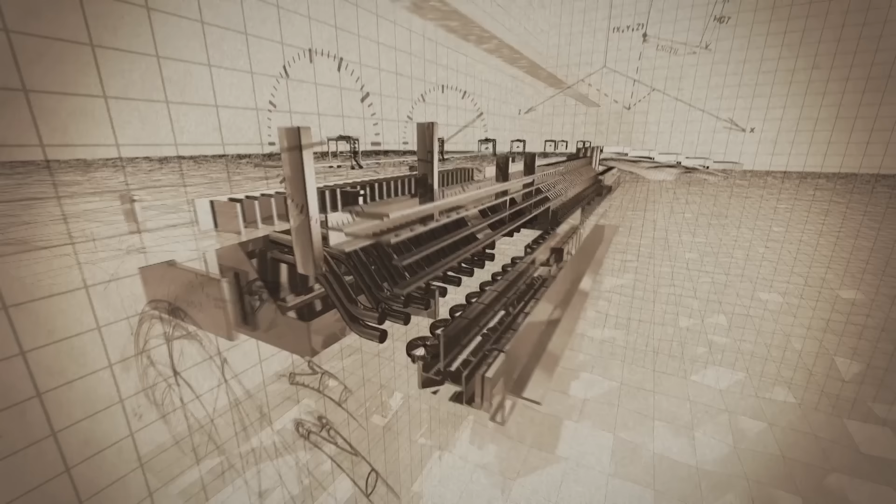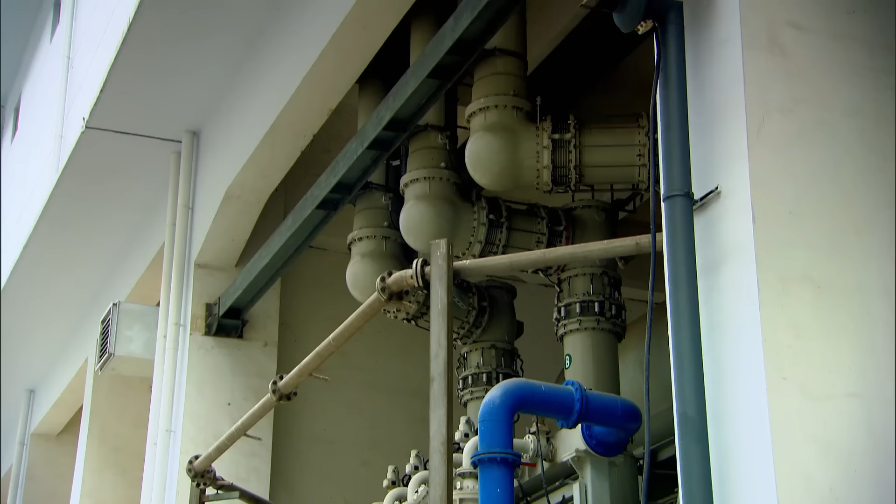At the Three Gorges power station, they're taking Nikola Tesla's innovative ideas and supersizing them. This is the main transformer of the Three Gorges power plant. This is to change the voltage into a high voltage. For example, the voltage from the generator is 20 kilovolt, and this is to change the voltage into 500 kilovolt.

The reason we step the power is we need a long-distance transmission. For example, we need to transmission the electricity to Shanghai. It's about 1,000 kilometers.

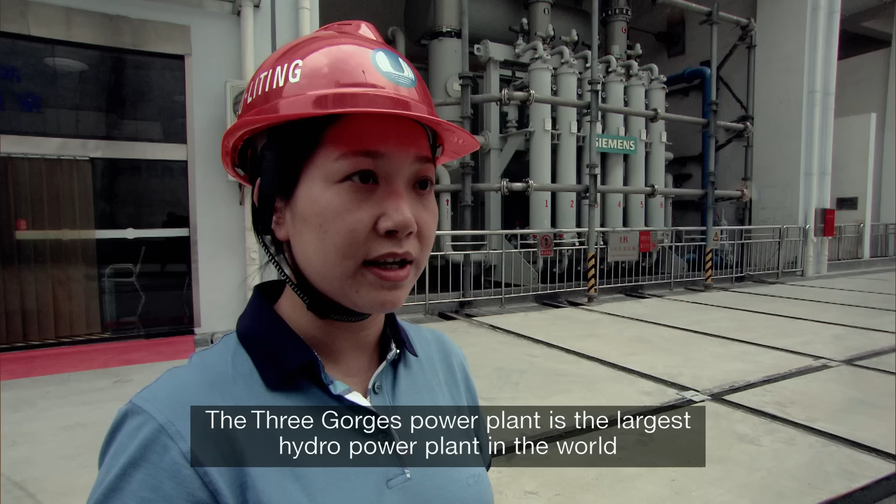The Three Gorges power plant now generates almost 100 terawatt hours, supplying 9 provinces and 2 cities, including futuristic Shanghai, producing more hydroelectricity than any other facility anywhere. Three Gorges power plant is the largest hydropower plant in the world.

When the giant shiplift becomes fully operational in 2016, it will signify the completion of one of the most remarkable engineering schemes in world history. The Three Gorges Dam has been one of the most ambitious projects ever, taking tens of thousands of workers, 17 years to build, and costing billions of dollars.

But in the end, it is truly an engineering marvel. By learning from the great pioneers of the past, adapting, upscaling, and making innovations of their own, its workers have created a dam and hydroelectric power plant unrivaled on planet Earth.

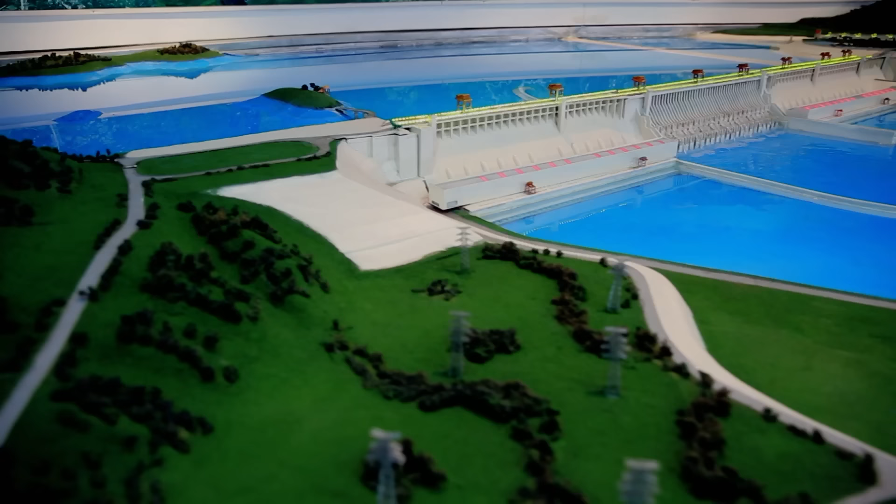For engineer Qihua Ding, it represents the culmination of a lifetime's dedication. It's my whole life work, and I feel very proud of this. I think the dam is amazing.